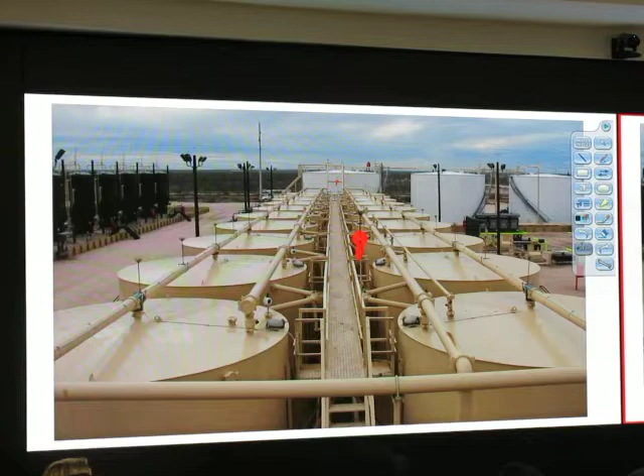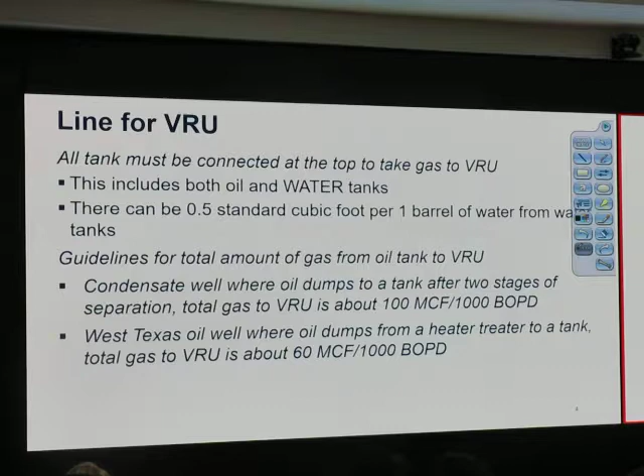Alright, last time we talked about storage tanks. Okay, and we went over this picture, right? We talked about the number of tanks, how many trucks we need, and if we have a certain number of trucks, we should use the LACT unit instead. We talked about that, right?

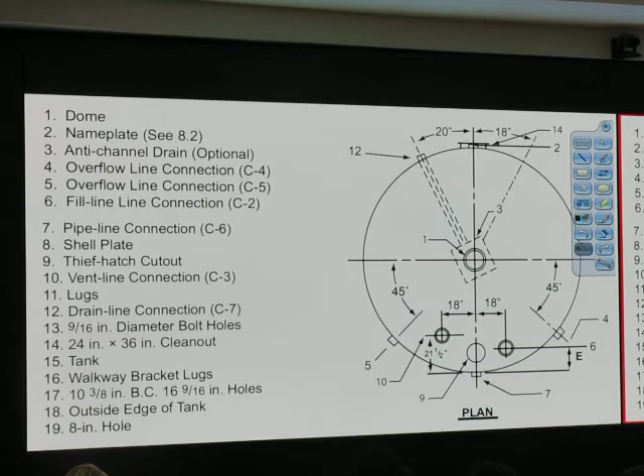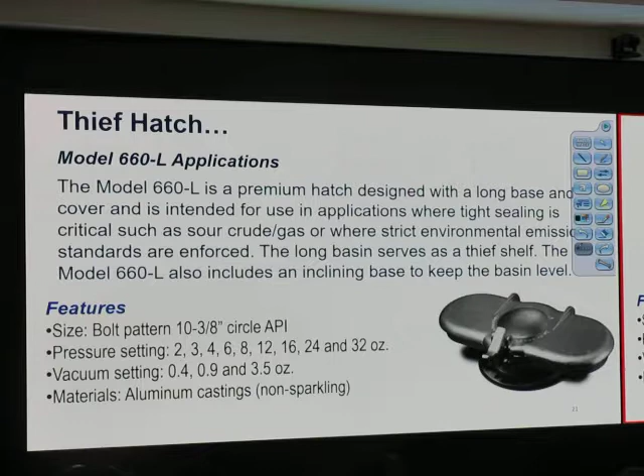One truck does 120, 140 barrel. This is a schematic of it. We talked about many things, thief hatch and what's that? Thief hatch, another model of thief hatch. Okay, both of them are thief hatch. Did we go over this quickly at the end, right?

So we have thief itself. We have this Kolor Kut to find the liquid level. And last week, Doug told me, Doug class, where are you? You're not here? Okay, we don't actually do this every day.

How often do we do it? Once a month? Just to check, okay? Once a month. And at the bottom, probably we may have some, maybe the company that we work at does once a month, okay? We have this hydrometer, we have water,

oil. We dip it in. That's how we use it. When we dip it in, we read the level. Okay, if the level stays over here, then we get API gravity.

Okay, that's how we use the hydrometer. So in a quiz, if we ask about hydrometer, anyone looked at the quiz yet? Don't look at it. Okay, don't look at it. If we ask about what equipment can be used to measure the density, you say this, okay? Kolor Kut, do what? Get the interface. You got that?

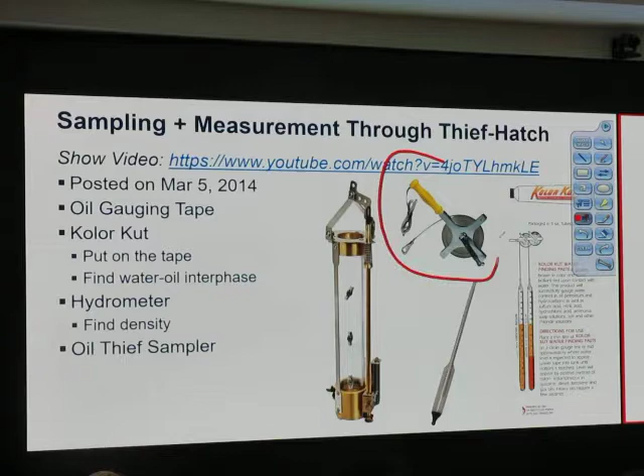Alright, tank gauging. This is a tank gauging table. With this table, we put the gauging tape in, then we find out. This is a depth of fluid.

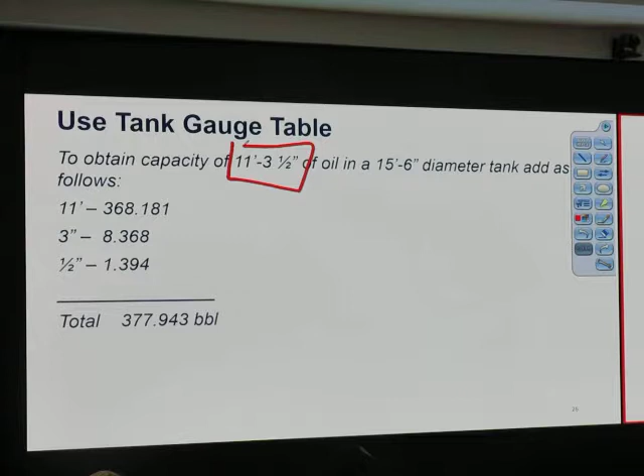We add everything together. For example, if we get 11 feet, 3.5 inch, so it's 11 feet plus 3 inch plus half inch. Then we go back to the table. 11 feet, okay, this 11 feet.

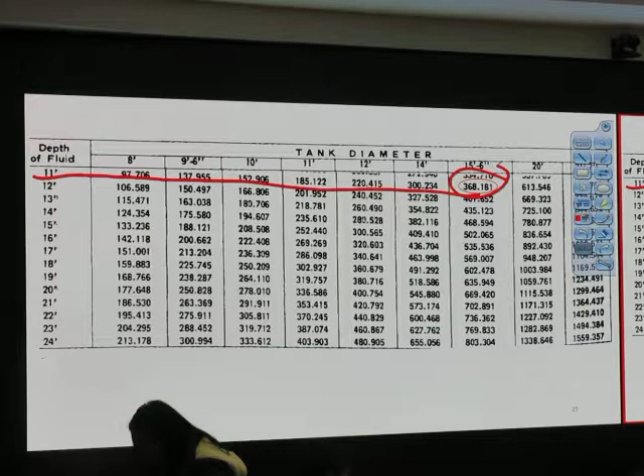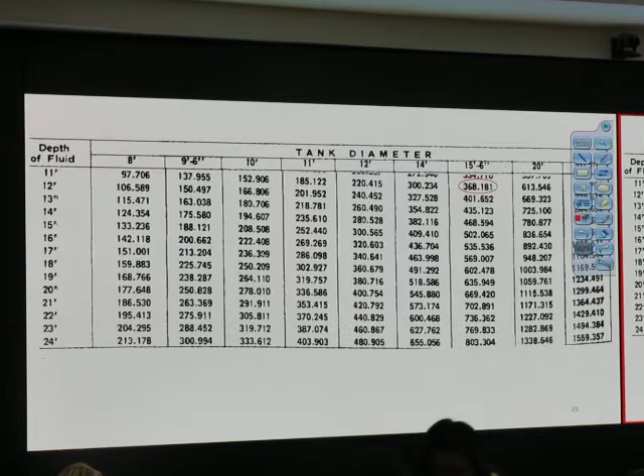That is how much per barrel. Okay, provided that we know the size of the tank. So this is the size of the tank. What else? 3 inch, so we go to 3 inch. 3 inch. So we know the size of the tank, then we can know the amount of barrel in the tank. And we have half inch, we add those things together.

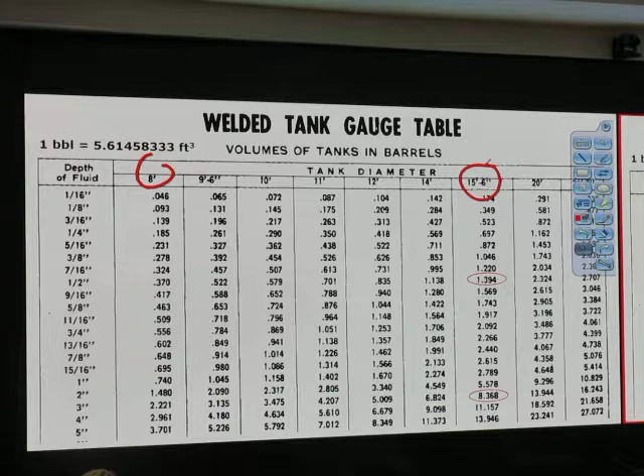The trick is, we need to know if it is an 8 feet tank or a 15 and a half tank. Good? No difficulty here, right? Okay, let's take a look at something

important. I think this is kind of important. In the exam, I can just ask you just one question, but I think it's important enough. Okay, you ready for this?

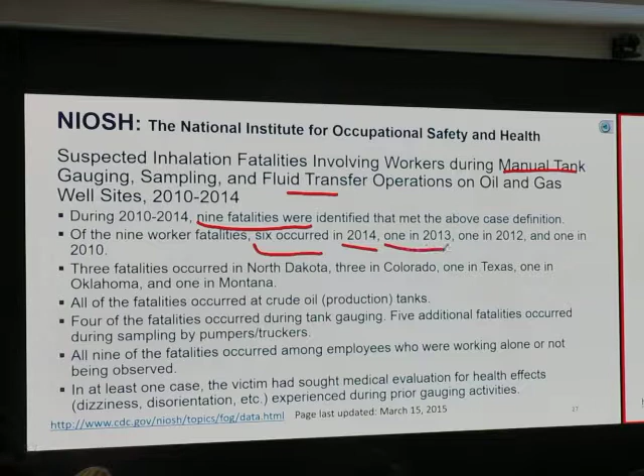Okay, this is from National Institute of Occupational Safety and Health. We have a suspected inhalation fatality involving a worker during manual tank gauging, sampling, fluid transfer operation on an oil and gas well site, 2010 to 2014. Okay, we have 9 fatalities, 9 workers, 6 occurred in 2014, 1 in '13, 1 in '12, and 1 in 2010.

And we actually have more data. Okay, 3 of them are in North Dakota, who has a North Dakota project on the senior design? Okay, so this is kind of relevant, right?

Okay, 3 in Colorado, 1 in Texas, 1 in Oklahoma, and 1 in Montana. All of the fatalities occur at crude oil production tanks. 4 of the fatalities occur during tank gauging, and 5 additional fatalities occur during sampling by pumper or trucker.

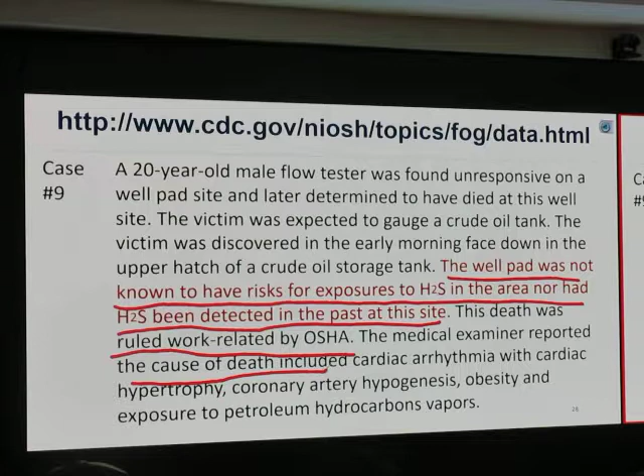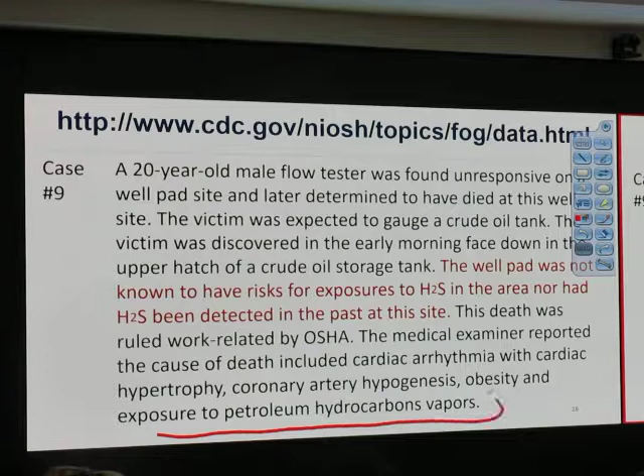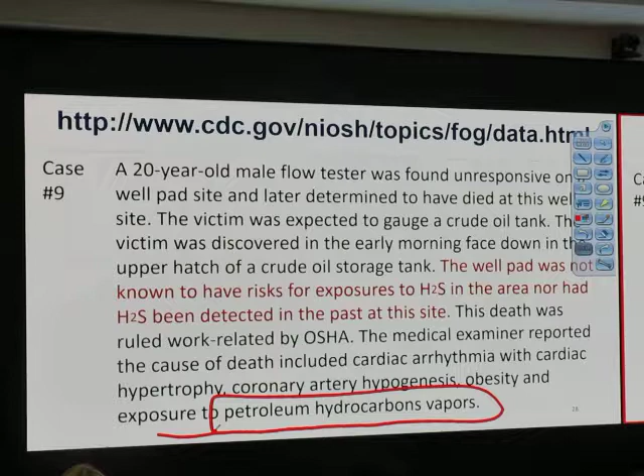But even if you don't have H2S, people can still die. It doesn't need to be H2S that kills him. This death was ruled work-related by OSHA, the medical examiner reported the cause of death included cardiac arrhythmia with cardiac hypertrophy, coronary artery hypogenesis, obesity, and exposure to petroleum hydrocarbon vapor. Look at this one - petroleum hydrocarbon vapor doesn't need to be H2S. When it is not air, not oxygen, and we inhale it, that causes a serious problem.

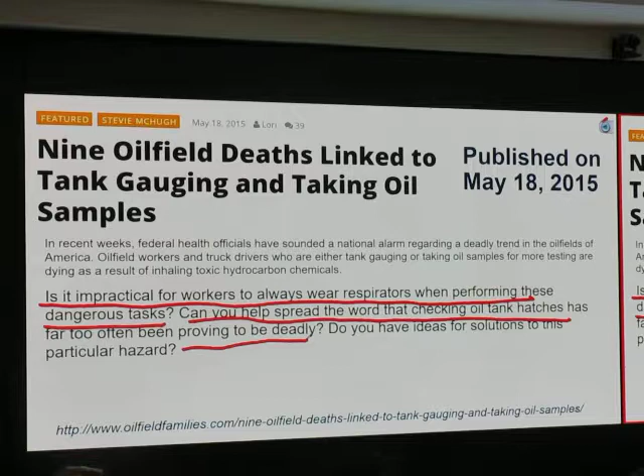Who has the idea? No extra oil or anything. Who has the idea? Mr. Lee, would you like to give me some idea? At least maybe don't work alone, but have someone try to catch you and get you to the hospital, okay? Any idea to prevent this from happening again in the future?

Should they have a respirator? One kind of respirator doesn't work for all, right? They have a specific type and they have to do a certain test. Okay. So maybe it's not that impractical.

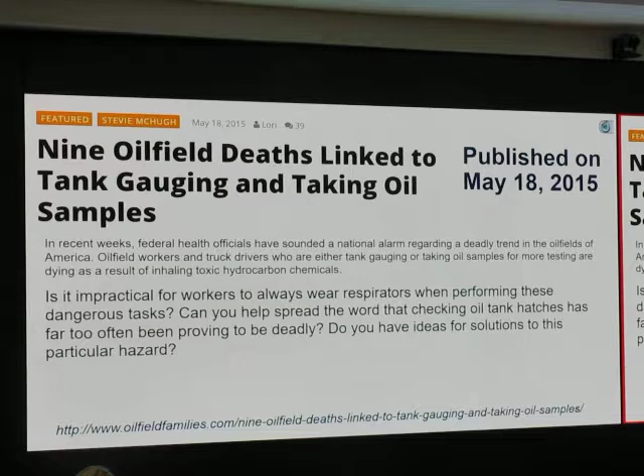So that was in 2015, reported in 2015, and this is a detail of those cases. Question on this: how did people die? Do you have any question about this? Okay, alright, I think maybe that doesn't happen again.

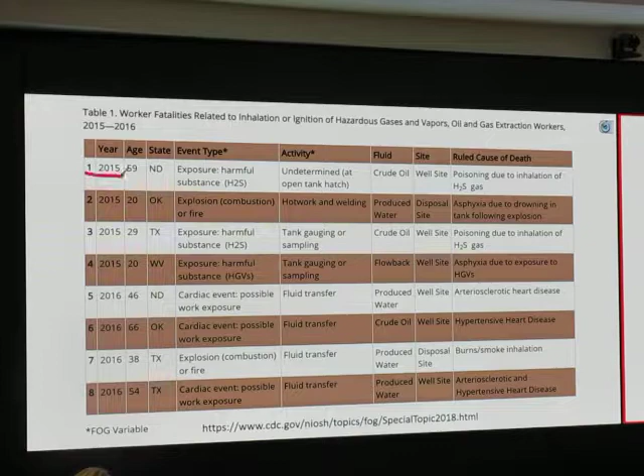And then I just looked at this morning - so this is a new slide. That was up to 2014, right? This one is reported in 2018. In 2015 and 2016, we still have 4 cases in 2015 and 4 more cases in 2016 in this report.

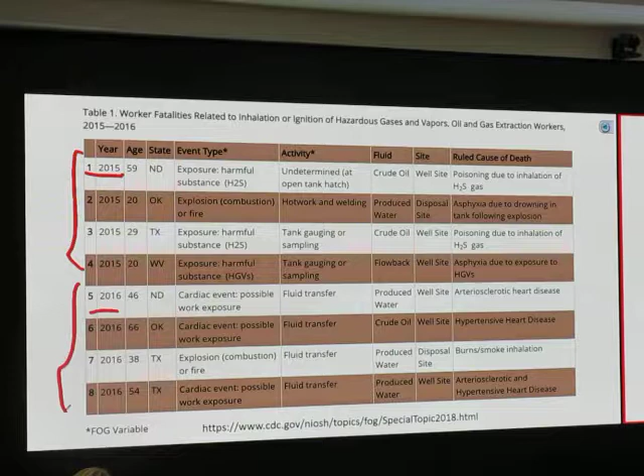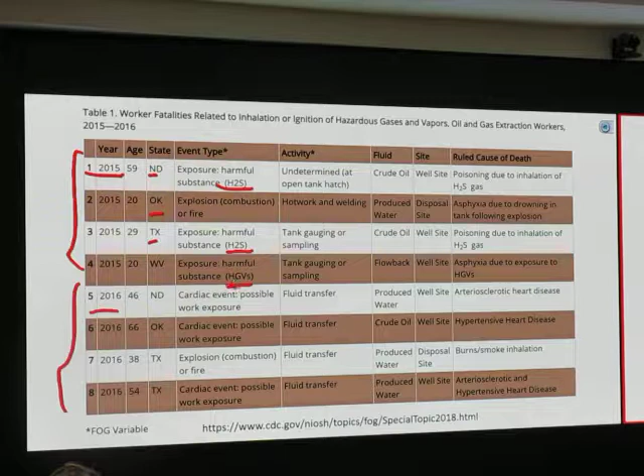So what happened is, okay, North Dakota, Oklahoma, Texas - they have H2S, HGV, hydrocarbon gas vapor. Okay, so sometimes they inhale HGV, hydrocarbon gas vapor. Possible exposure leading to a cardiac event.

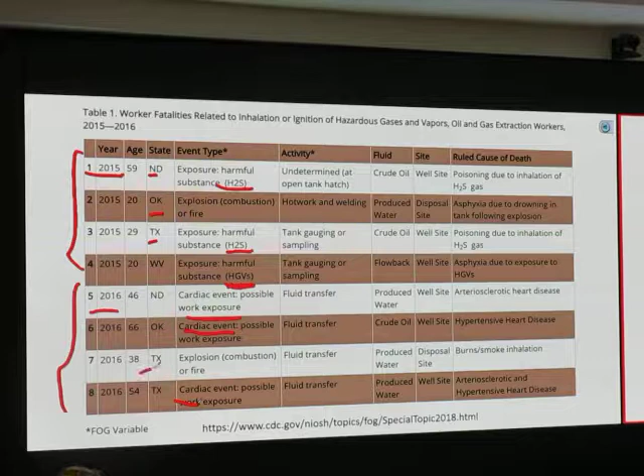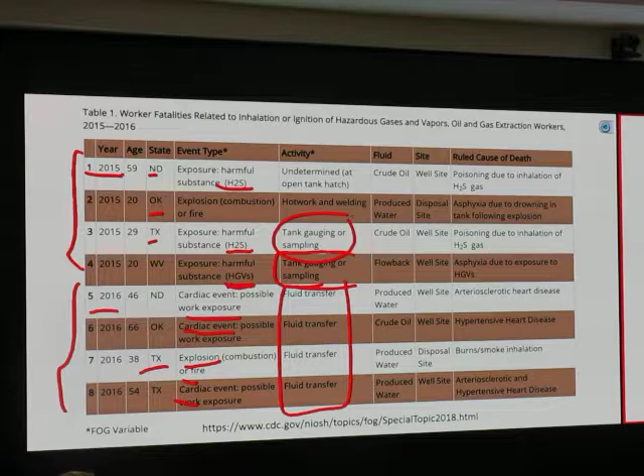Okay, this is in Texas - explosion or fire. Many of them do fluid transfer, tank gauging or sampling, hot work and welding, or undetermined causes at open tank hatch. Okay, so it could be dangerous.

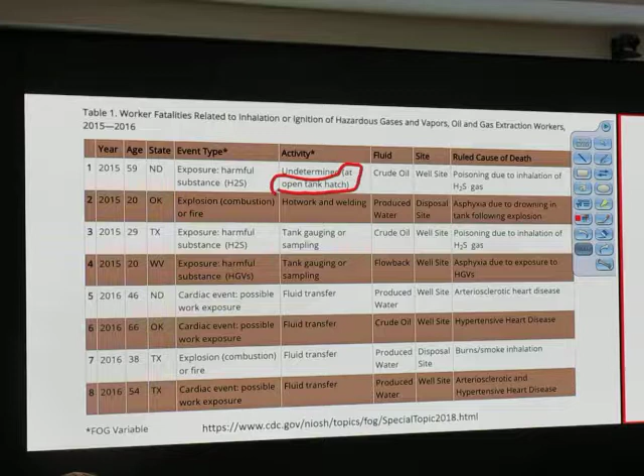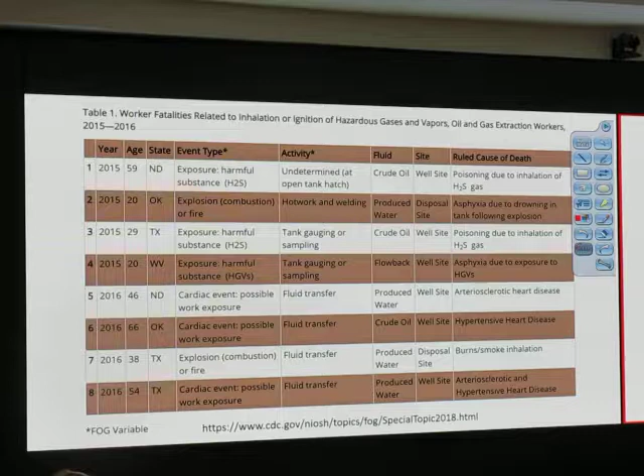Be careful with that. When we open the tank hatch, do we stay upwind or downwind? Who wants to stay downwind? Upwind, right? If you stay downwind, you die. Stay upwind. Good? Alright, so another case about people getting injured, okay?

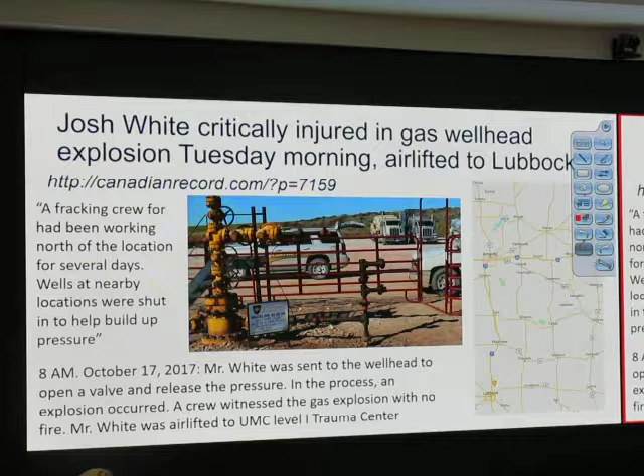So that's just opening a valve. Be careful with doing that. This is just to let you know that accidents can happen. Something failed to cause that, it wasn't opening the valve that hurt it. It's open a broken valve. If the valve works properly, everything works properly, no problem.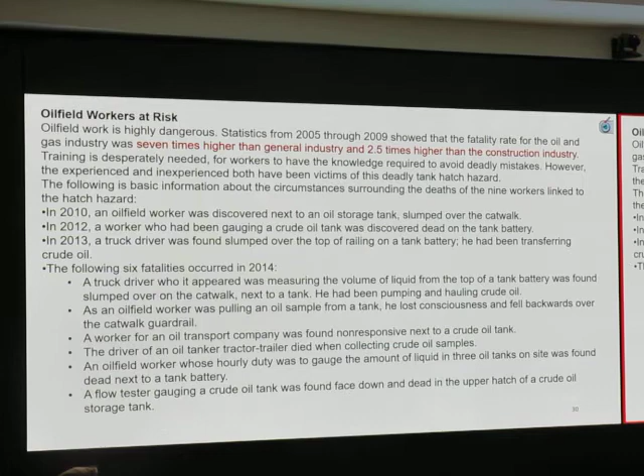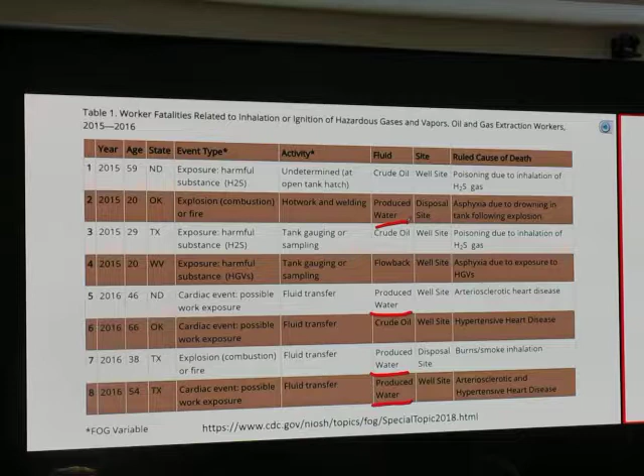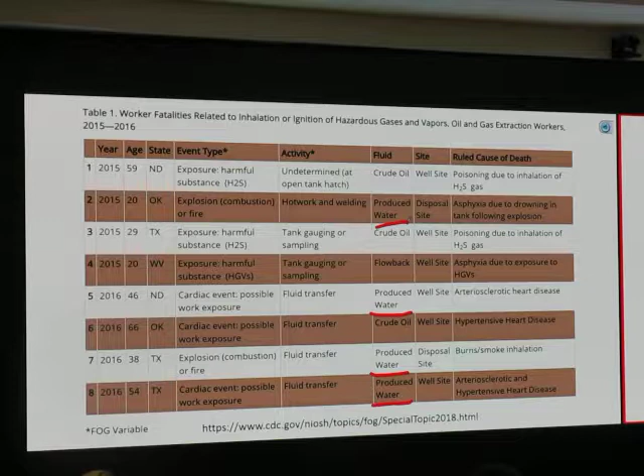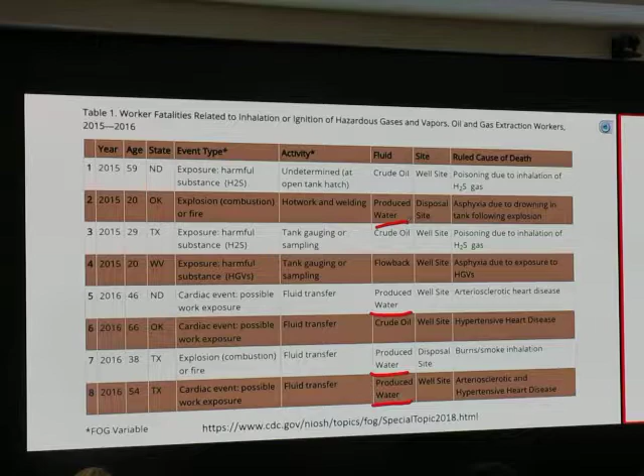Look how many of those involve a produced water tank, not necessarily a crude oil tank. Water still has gas vapors in it, and they could be H2S gas vapors. So just because you're working with water doesn't necessarily mean that there's also a large volume of gas discharge, even if the gas isn't toxic, it can displace oxygen. So you can be in an area that's starved for oxygen, even though the gas isn't toxic, it just takes away the oxygen, with a large release all of a sudden in a confined area. Confined space entry is something like, when you start talking about tanks, you don't go in there unless you're qualified, trained, there's crews that know how to do that. You don't go into the tank by yourself, especially without training. So not everything has to be H2S related to be a danger when you're handling those fluids.

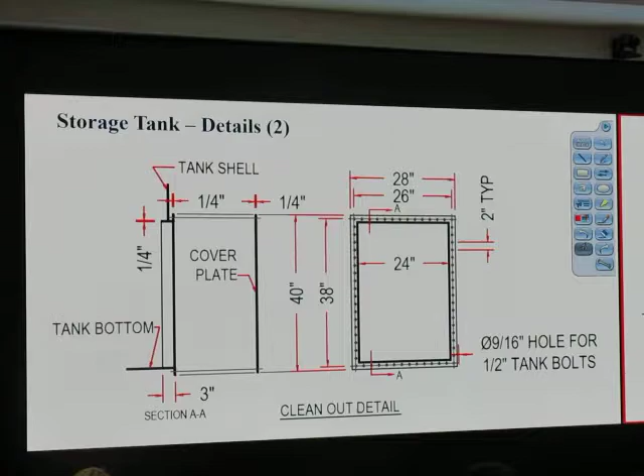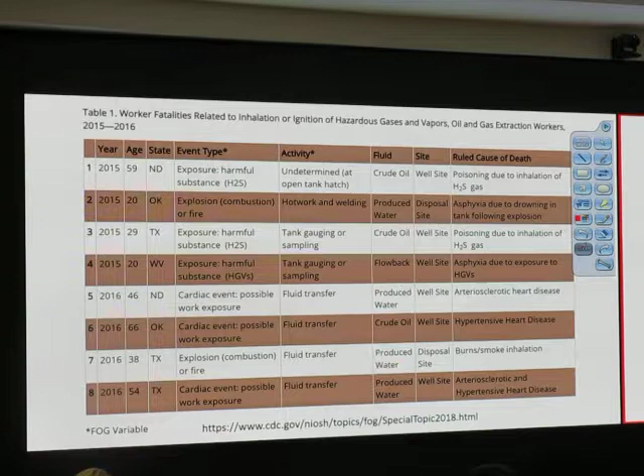Okay, thank you. So this opening, don't just go inside, okay? And when it is a water tank, it's not that safe, even if it's a water tank, produced water. Be careful when you're actually working, okay?

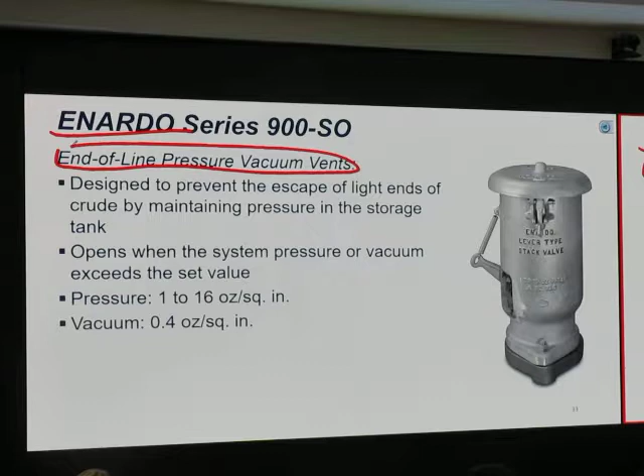Another valve, this is another type to relieve the pressure from the tank. In addition to the thief hatch, we can put it at the end of the line. This is the brand, Enardo valve or end of line pressure vacuum vent. It helps to release the gas, opening when the system has enough pressure or vacuum exceeding the set point. So it can let gas in, it can let air inside or it can release gas out. So when you see this, they put it at the end of the line. We try not to use that, even though we have that. We move most of the gas to the vapor recovery unit.

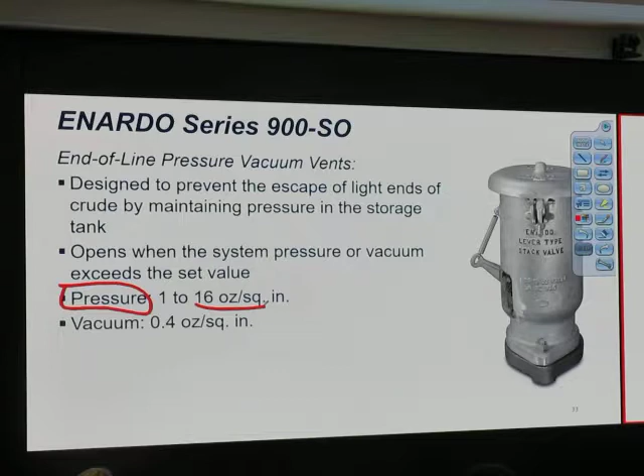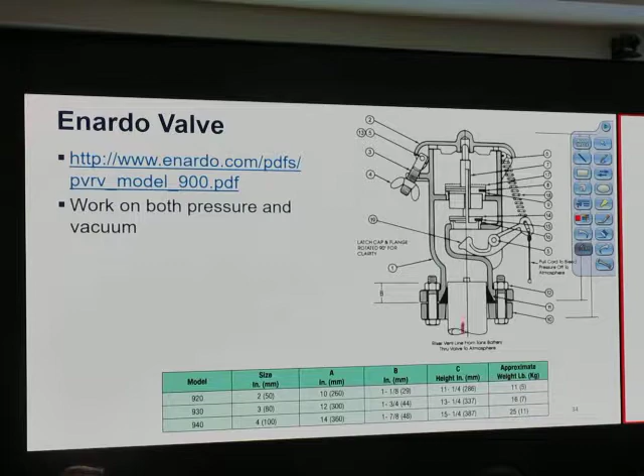This is the set point. They can set pressure of 16 ounces to open, or have a vacuum of 0.4 ounce, then it lets air come inside so the tank doesn't cave in. This is the working mechanism. So gas from outside can go in this way, and gas from inside comes out.

Another type of pressure relief mechanism is the inline vent valve. They just put it in the line, you cannot really see it, it looks like a fitting, but it's actually an inline vent valve. So this kind of inline vent valve has pressure from the tank push against the spring, then it can move on. So this can be before the vapor recovery unit. The detail on the set point, read it.

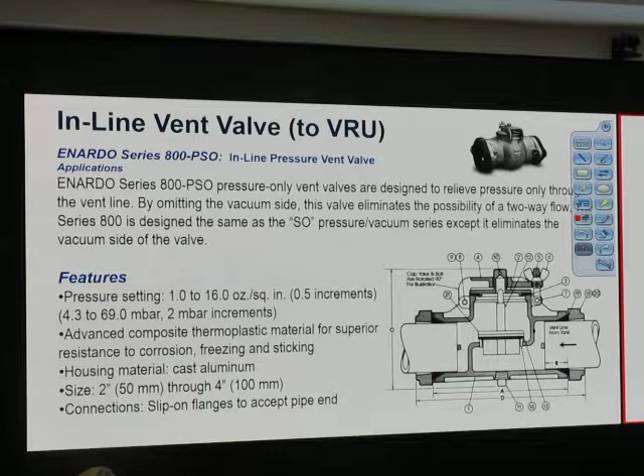Why do we need all these relief valves, vent valves? We don't want to have... what's your name, Pedro? Jose, how are you doing, sir? Why do we need the relief vent? To relieve pressure. If you don't relieve pressure, what happens? It builds up and the tank will fail. If the tank fails, where do you want it to fail, on the roof or at the bottom? If it's like an explosion or something, when it fails, where do you want it to leak or bust first, on the top or at the bottom? Why do we want it to fail at the top?

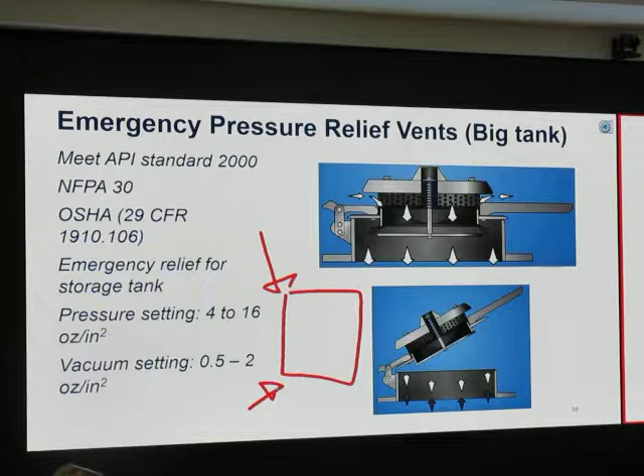So if it fails on the bottom, what will come out? Oil, and the oil will be everywhere, okay? That's why we don't want it to fail at the bottom. We will talk about it on that slide.

Okay, let's talk about pressure setting, and I think we'll be done with the tank. Tank vent valve should be set at a lower pressure than thief hatch, so that gas go to VRU first before it go to the atmosphere. You don't want gas to just go to the atmosphere, right? You want gas to go to VRU first. The way they do that is vent valve that go to VRU, maybe set just 2 ounces.

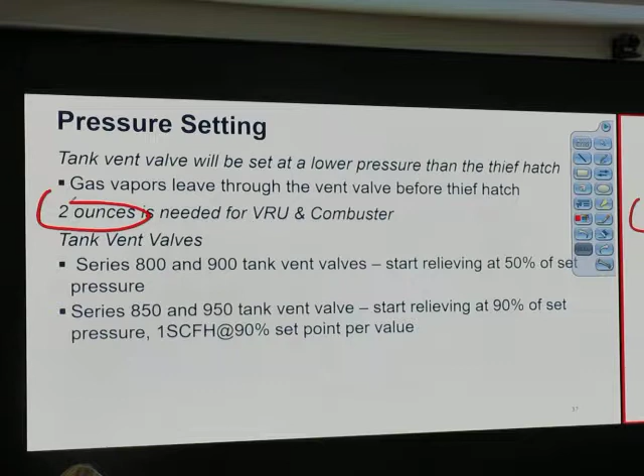The gas that go to VRU, and gas that go to thief hatch, we may set at high pressure.

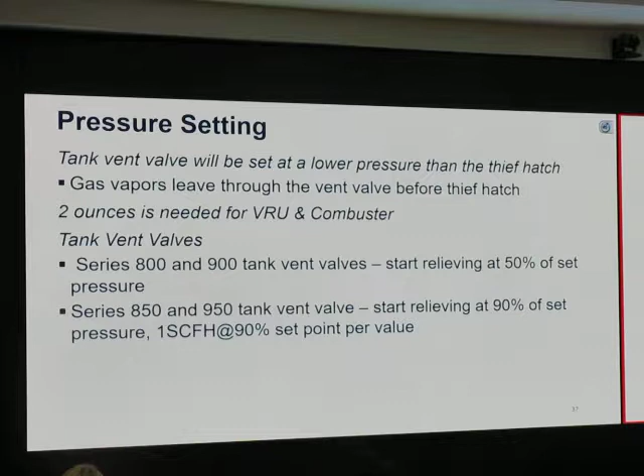One thing to point out is this vent valve, when it open, it doesn't just close or open. It can open 50%, it doesn't need to be 100%. Vent valve Series 800, 900 tank, vent valve start relief at 50% of the test pressure of the set pressure. Some models start to relieve at 90% of the set pressure. What does it mean? It opens over a range of pressure.

And if we have two equipment and those ranges overlap, not good, okay? Those ranges should not overlap. That's a key message here.

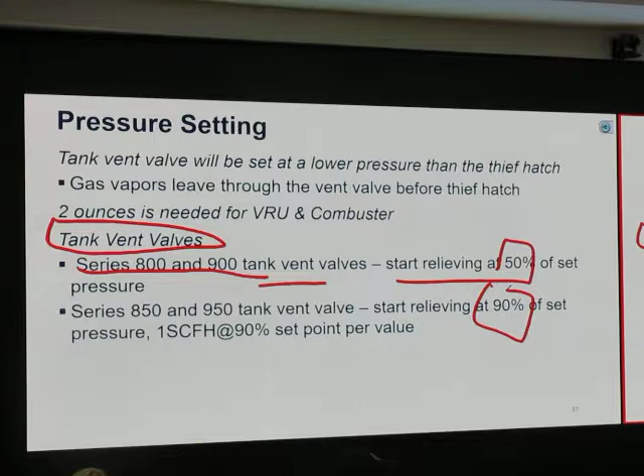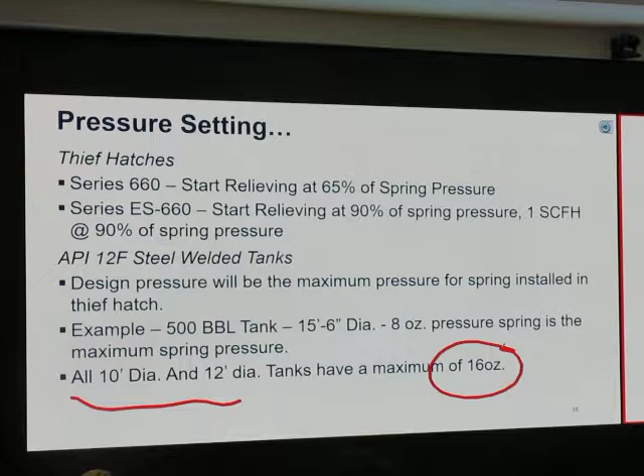Alright, this is a thief hatch. Thief hatch open at 90%. Okay, this is an example of the set point. All the tanks have about 16 ounce, okay, when we design the pressure to relieve.

Okay, first example, this one talks about the case where the set points are too close together. Too close set point, bad design. So this one, I have 2 ounce for VRU, which is needed. We have a thief hatch open at 65%, and we set it at very close pressure value, 4 ounce and 2.6 ounce.

So what happened is, when it starts to open, both of them kind of compete against each other. That's not good. If VRU opens but not all the way open, this one starts to open too. So this means we lose the gas to the atmosphere instead of selling it.

Okay, when the set points are too close, we have a problem. Too close means 4 ounce at the set point, but it starts to open at 2 ounce of pressure. And we have thief hatch set point at 4 ounce, and it starts to open at 2.6. So it opens partially, both of them at the same time.

A better thing to do is set a higher pressure rating for thief hatch, 6 ounce. So when I set it at 6 ounce, it starts to open at 3.9 ounce. And on the vent valve, I may set at 5 ounce vent valve, which will start to open at 2.5. This 6 ounce starts to open at 3.9 ounce. So this way is not too close, and it's not going to open at the same pressure.

Key message here is to have the set points somewhat far apart. Alright, I don't expect you to know that this model will open at this percentage and that model opens at this percentage. No, that's not the question that I should ask. But you should know that it can open before the set point. That's what you should know.

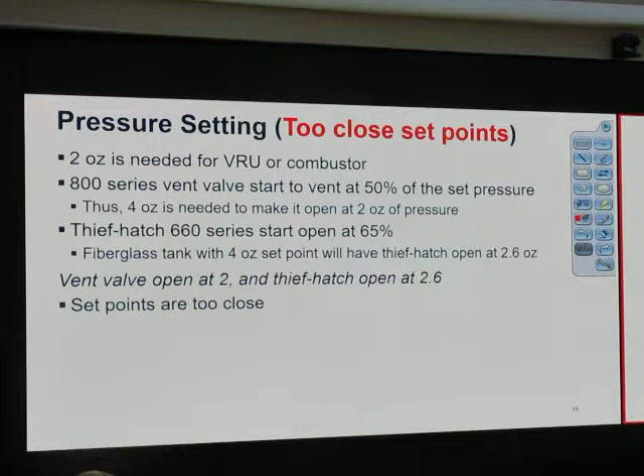Alright, I have a note here. If VRU or combustor is far away, we may have some pressure drop in it, so we may have to set it at a little bit more pressure. When the gas flow has some pressure drop, we may need more than 4 ounce, or we may need more than 2 ounce for VRU or combustor.

When we really do this kind of setting of the pressure, I recommend to consult with the manufacturer on the beginning of the opening. It's not just on-off, it can partially open, and if both of them actually open, it creates a problem.

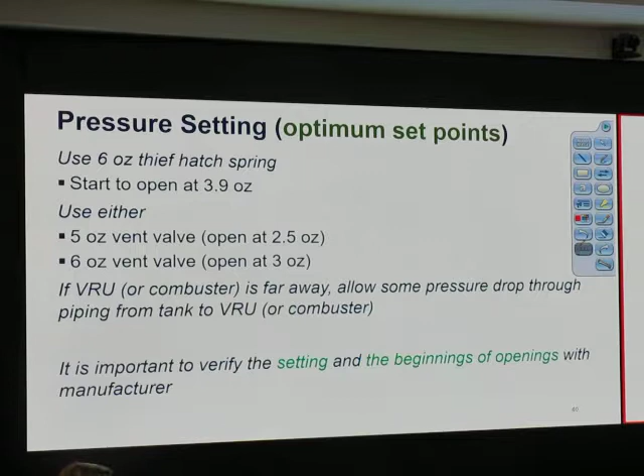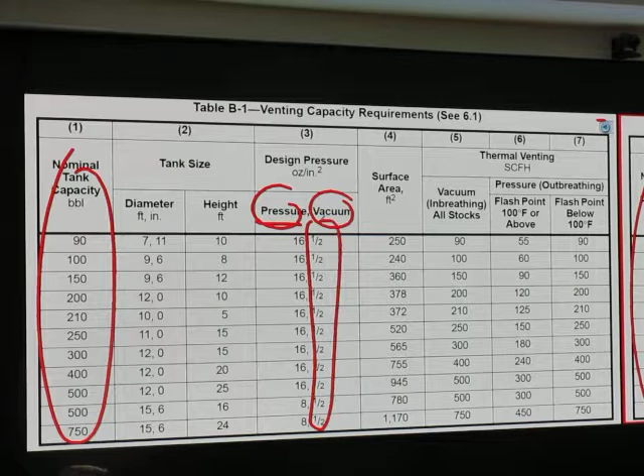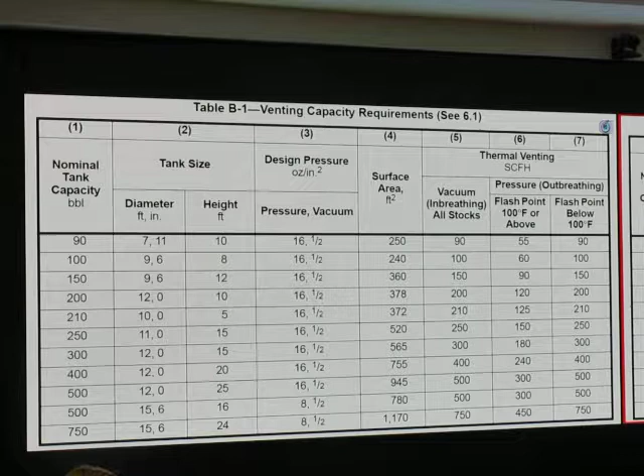This is what we talked about earlier. If we have the tank and that tank happened to fail, we want it to fail from the top first. So to have that kind of mechanism that the top fails first, we have to have what we call frangible deck, for deflagration venting.

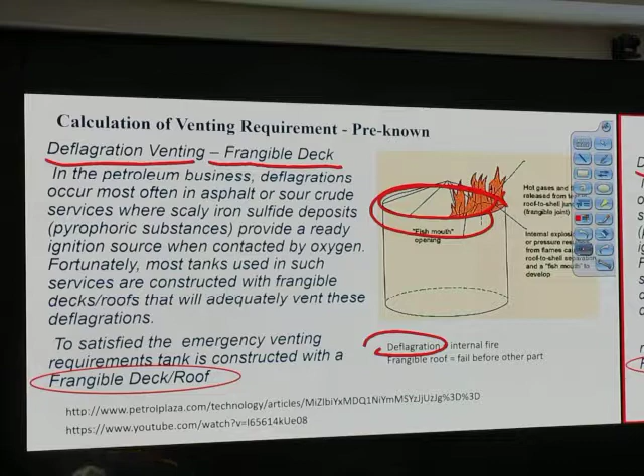We have internal explosion, so the top that fails first - internal fire is deflagration, that is internal fire. What we need to accommodate with that fire is frangible roof. That's the keyword that you put in your quiz, if any. Frangible roof is needed so that the top fails first. If the bottom part fails first, it all comes out together with the fire, and it will fire everywhere. Bad, not good.

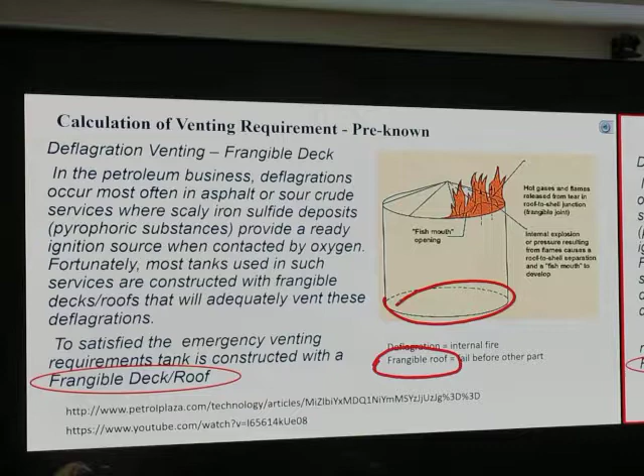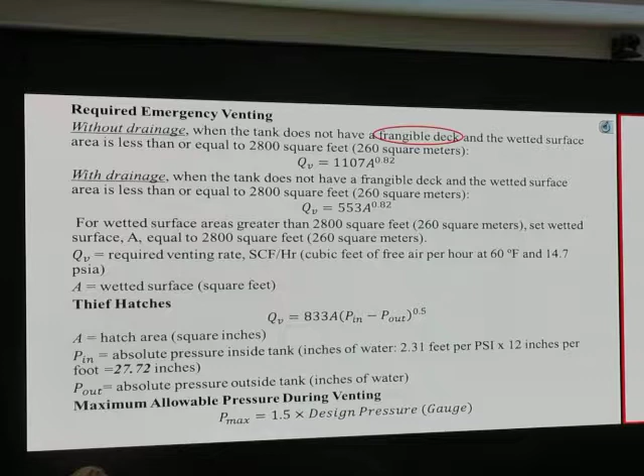All right, this part is calculation, more in-depth calculation for the emergency venting. We skip this in this class, and next semester let's use it for grad students. Venting requirement, we skip that.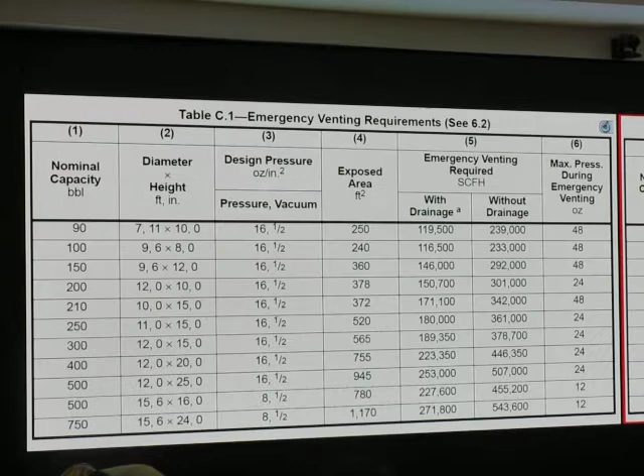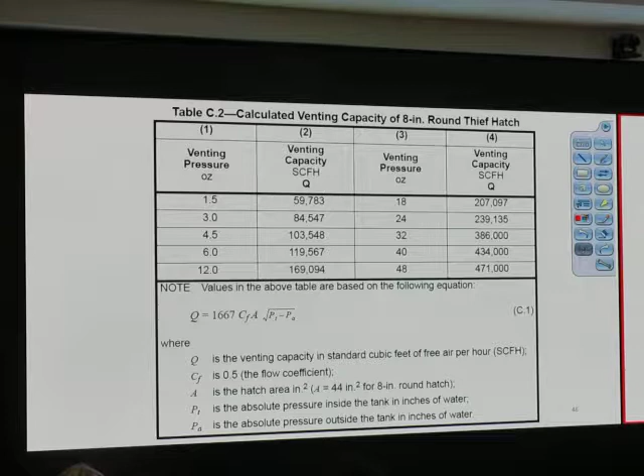Emergency venting requirement, you use this for your design. And more calculation about the venting requirement, we skip that.

This is schematic of the gun barrel, the last type of tank. Gun barrel is a very tall tank. It has a spreader plate.

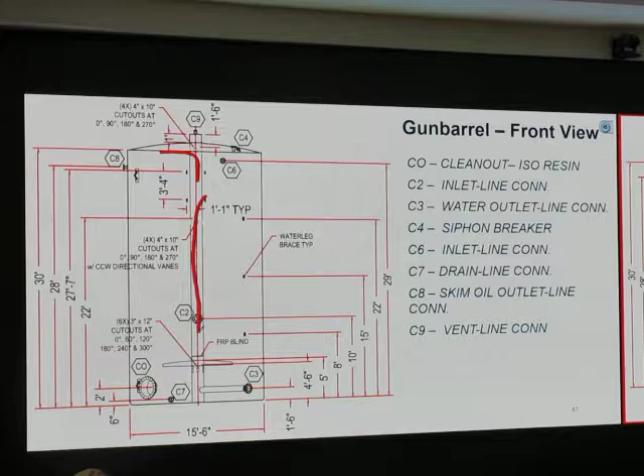In the field trip, I may explain it wrong, so let's clarify it. Mixture of mostly water with a little bit of oil going down here, and it goes up and hits the plate, and it comes out. So that is the spreader plate, to spread it everywhere. Because the gun barrel has big volume, it has a lot of settling time, allowing good separation.

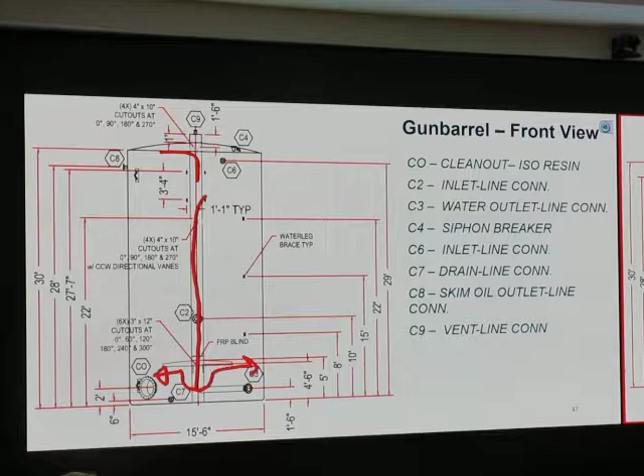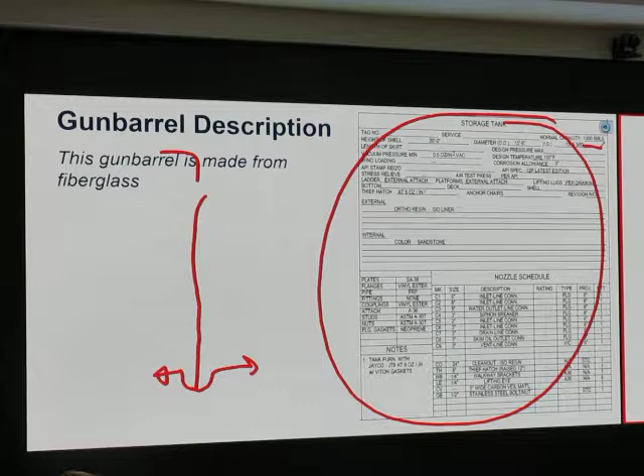Alright, and this is a schematic of gun barrel - top view, side view detail, and the description when we have it or when we buy it. So this one is 1,000 barrel. This is just for you to see how they specify it.

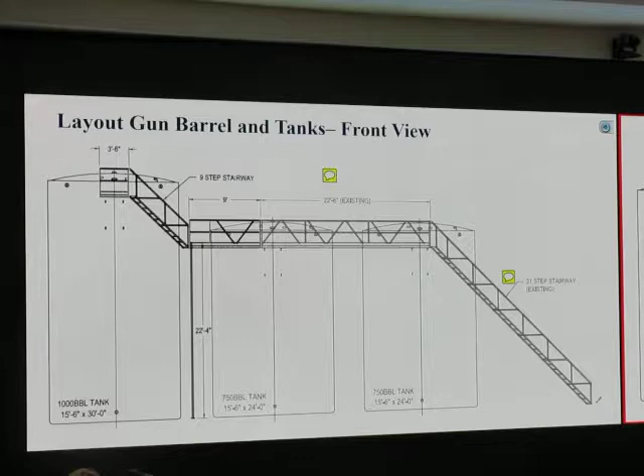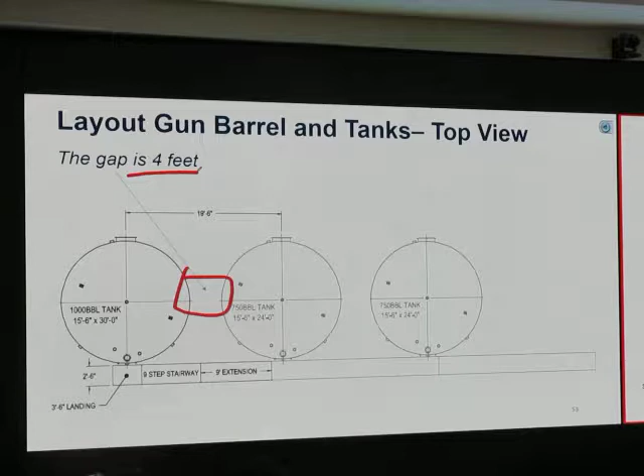Gun barrel together with the tank, with the stairway going up, that's the drawing. How much should be the gap between this tank? How much? 4 feet. We should have some gap between those tanks - not too far away. If we have it too far away, we need a longer pipe, but if it's too close, we cannot work around that or put a pipe between it. At least it's about 4 feet.

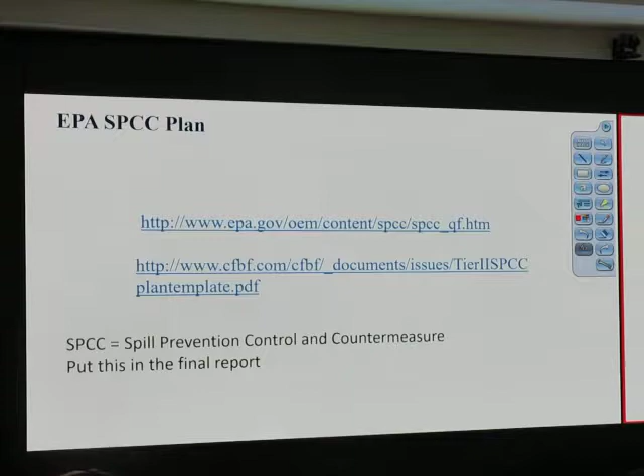EPA SPCC plan. SPCC is Spill Prevention, Control and Countermeasure. Information is on those websites, which is for you to read and put in the term project. How about that? Put some information from that in the term project. Why do we need SPCC? What is SPCC? That's it.